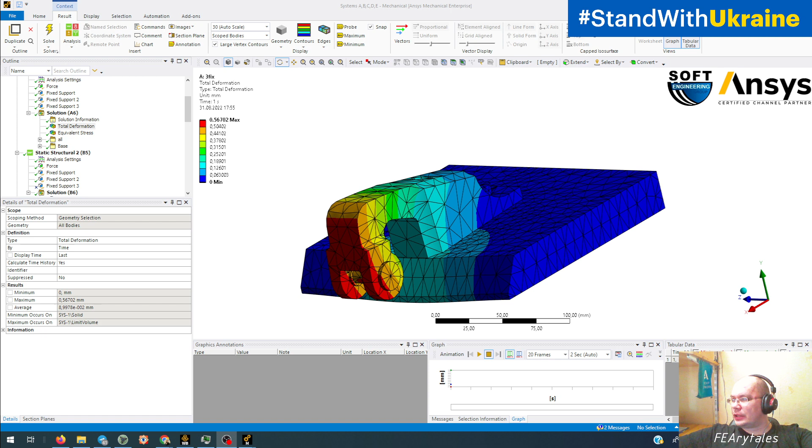Now we continue talking about the difference in statements and the difference in results which are obtained with different statements.

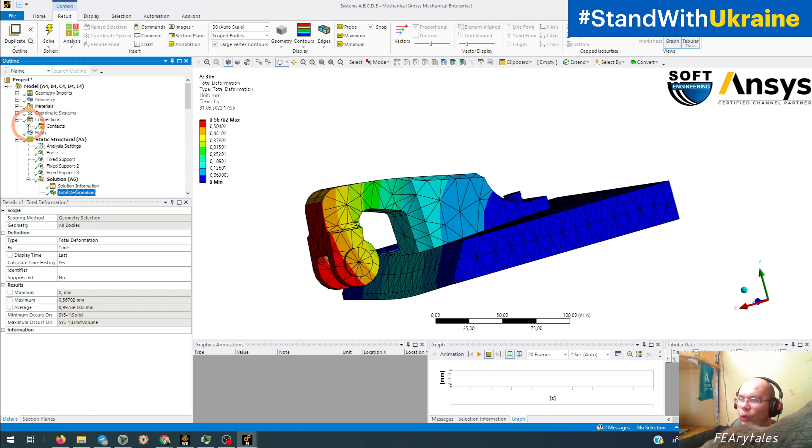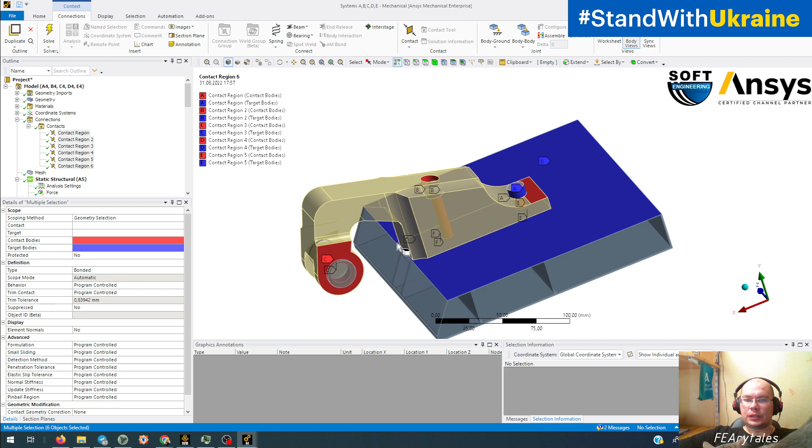Today we talk about contacts. This result is without non-linear contact, so it's with linear, bonded contact for all objects. All six different types of contacts - with crank and base, with bolts and crank, with bolt and base, with pin and crank - all these connections, all these contacts are bonded. So it's a linear contact in terms of Ansys.

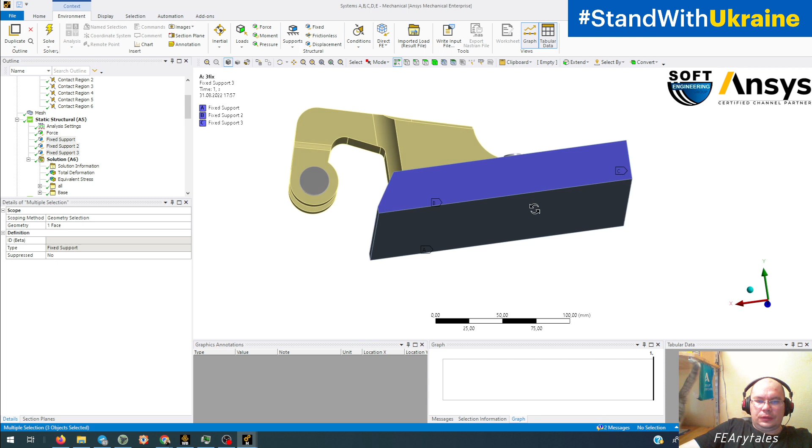We obtain a result for 3 faces that fixed for 10,000 newtons. We obtain 0.57 millimeters.

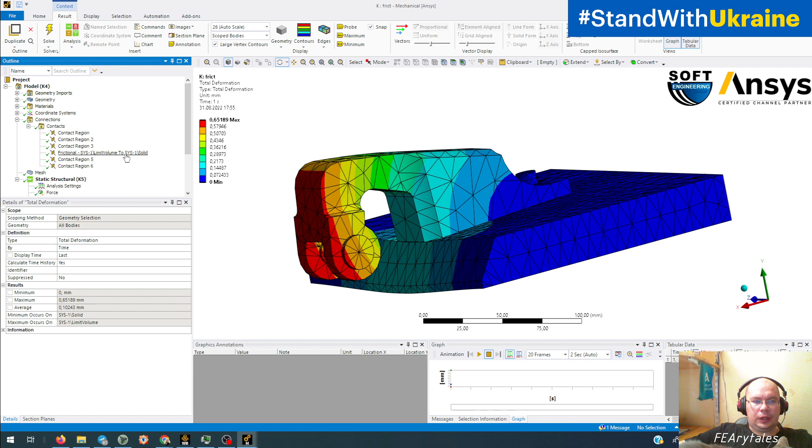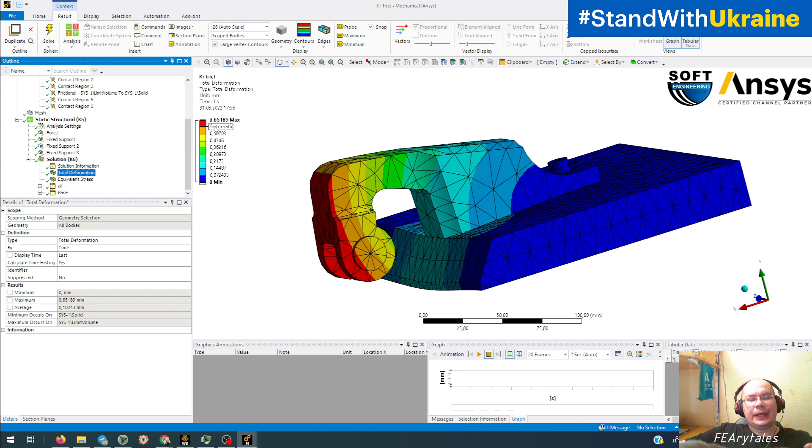And if we apply contact between crank and base in a non-linear variant of this contact, so for now it's frictional, not bonded. All others are bonded, and this one is frictional. We obtain a result of 0.65 millimeters, so it's almost 20% difference in result.

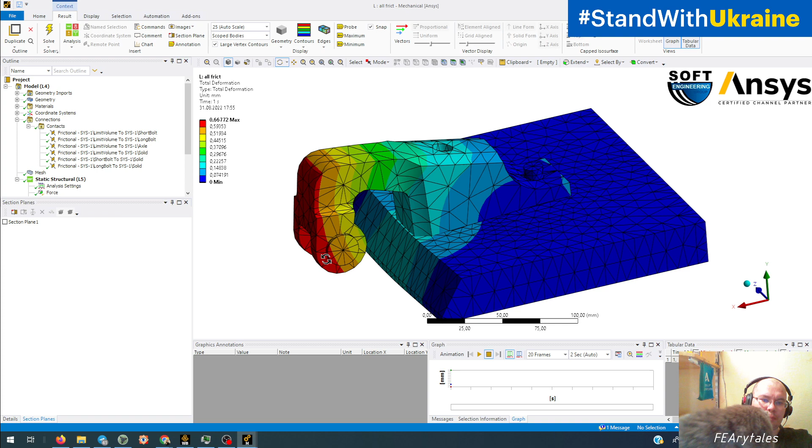If we go further and change all types of contacts to frictional - bolts and crank, bolts and base, pin and crank, crank and base, so all geometry - all geometry have non-linear contacts. We obtain 67, so it's less than 5% difference in result on deformation.

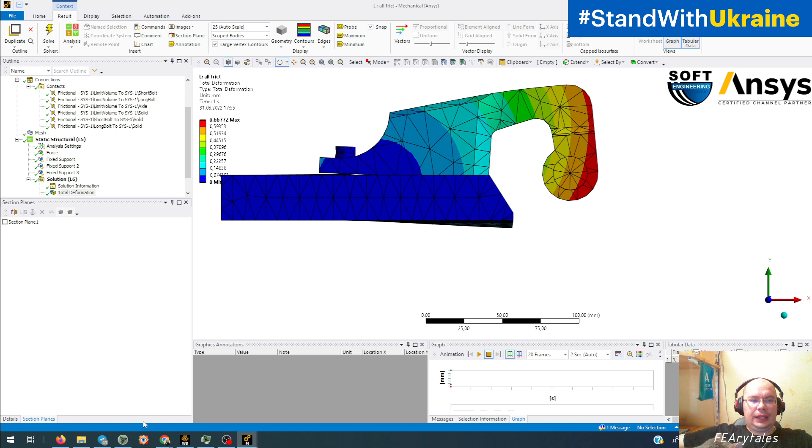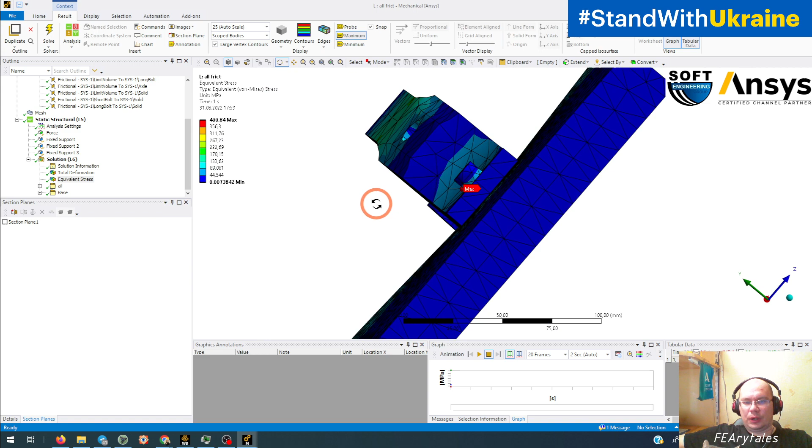In stresses, we obtain 400 megapascals maximum. We see that maximum is here. We don't understand where it is exactly, but we'll talk about it later. 400 megapascals here, not here, and not here.

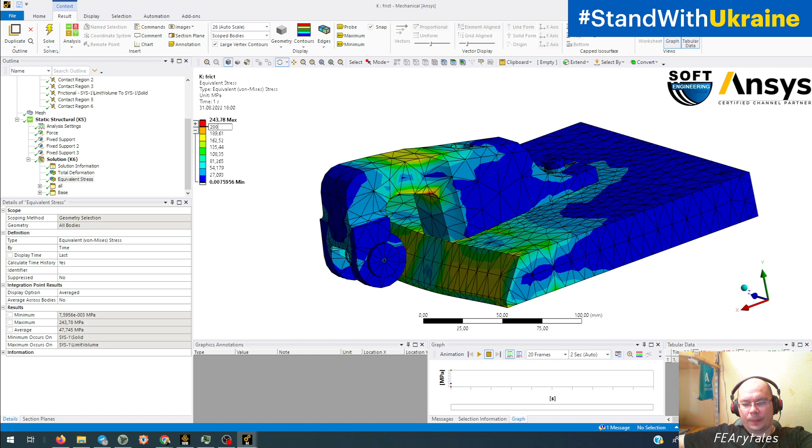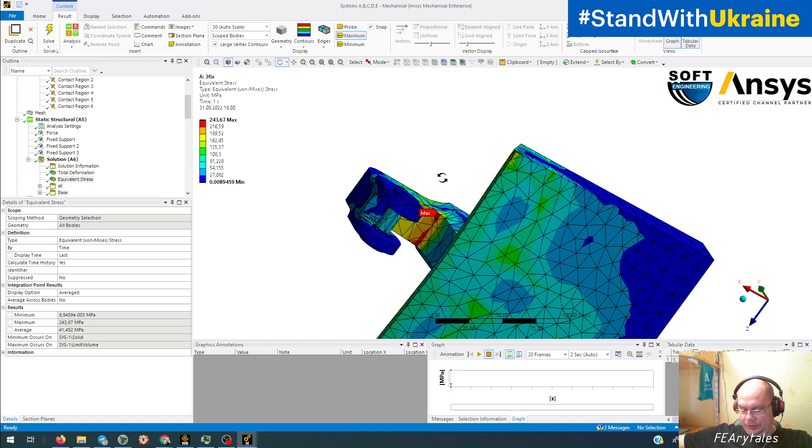If we change scale to original, we see that stress distribution behavior is much closer to original, and it's not very dependent on the type of contacts for this task, but we see some difference, and we see that the maximum with one contact is in the same place where we have the maximum in the original task with bonded contact.

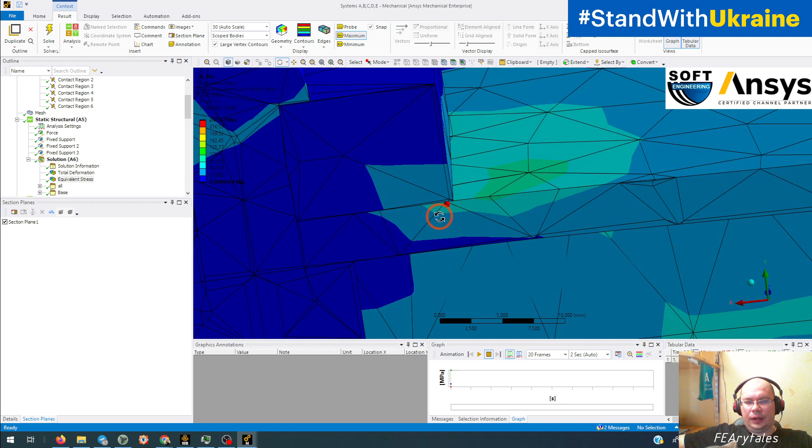What difference in behavior can we see additionally? Here we see that our objects are glued one to each other, and it doesn't have any gap here, any deformation of bolts which are not corresponding to crank or base.

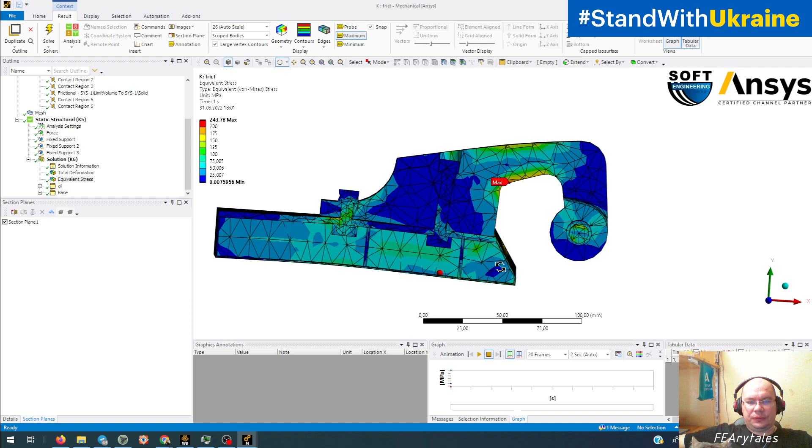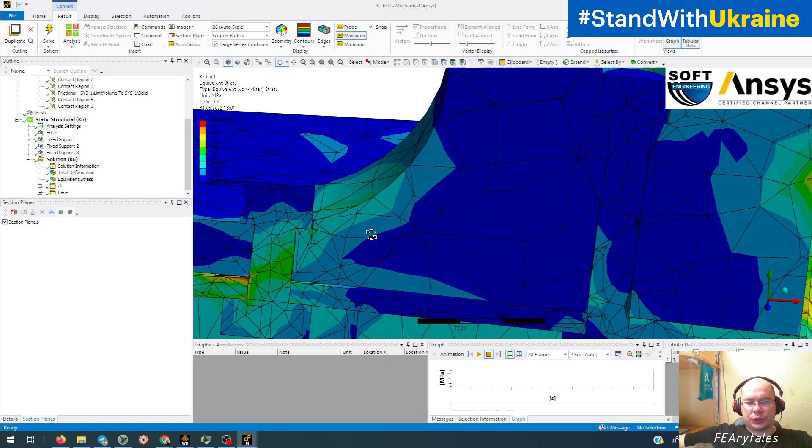If we take a look here on a task with one contact, we see some difference. We see that we have some gap here, and even here. But we almost don't have a gap here for one contact. Our bolts are glued to crank, glued to base, so we have very small deformations here. It has a strange view here, but the reason is that we project geometry of elements on a section plane, so it doesn't matter.

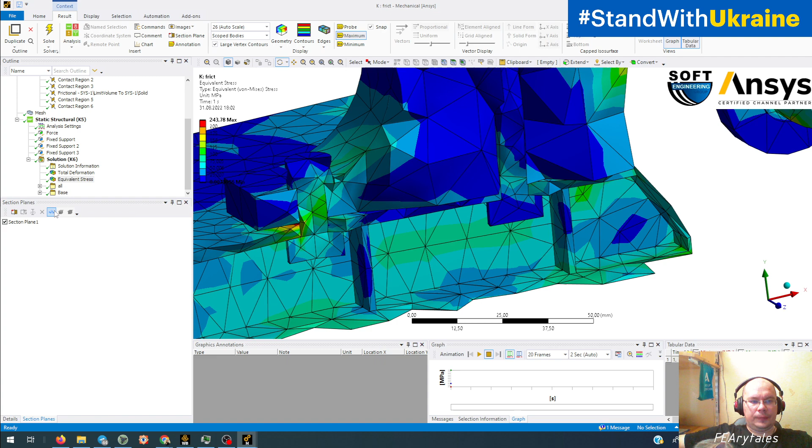And we see that here we have very big stresses - not the maximum, because the maximum is here, but big stresses here.

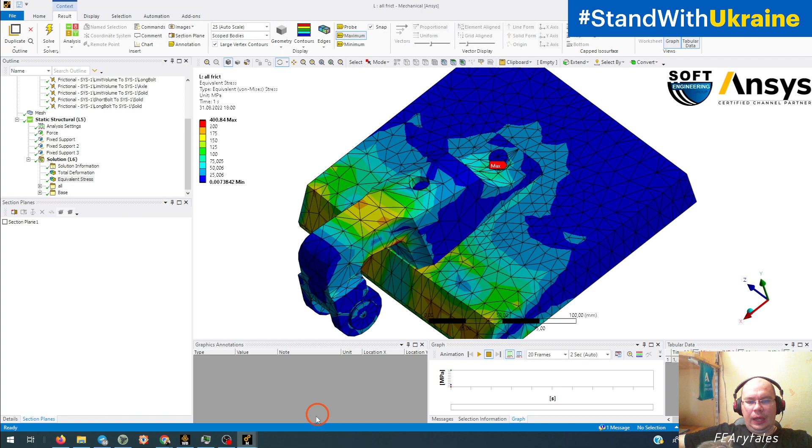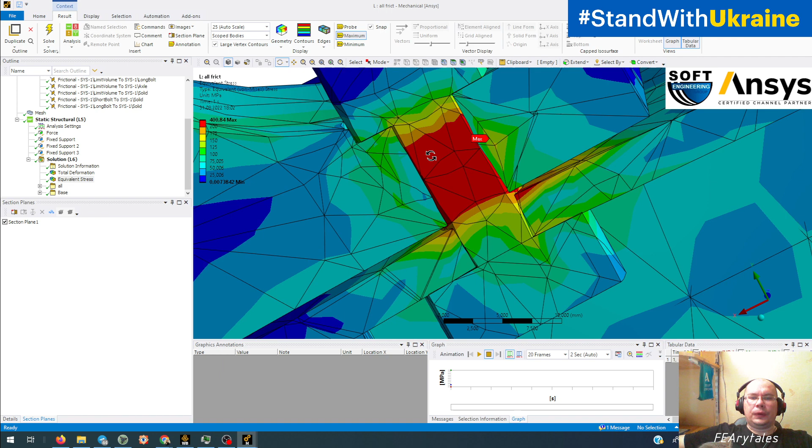On the last variant, where we have all contacts, we see that we have the maximum either on the bolt surface or on the hole of the crank, which is present here. We see difference in behavior. We see that a gap is present here, and if we change the scale factor, we'll much better see that we have a gap here, and the point of rotation of our crank is not here, not here as in the second variant, but here as in the third variant. It's a very small gap, but it's present.

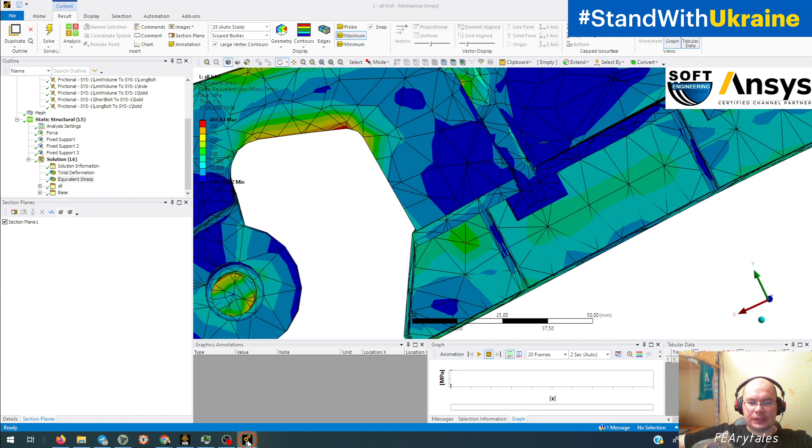In the second variant, because of the bolt which is glued to both objects, rotation started here. We can also see some difference in those places and those places for the bolts, and for the crank.

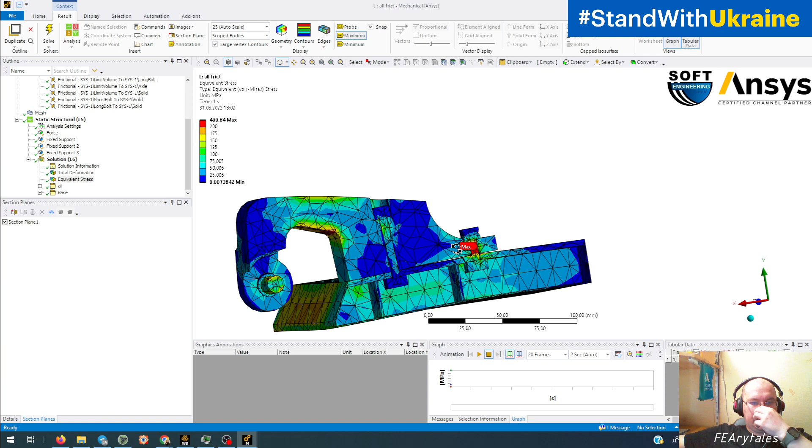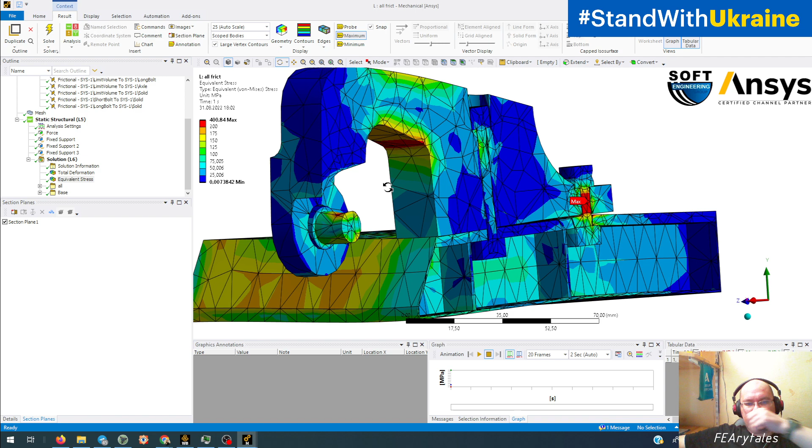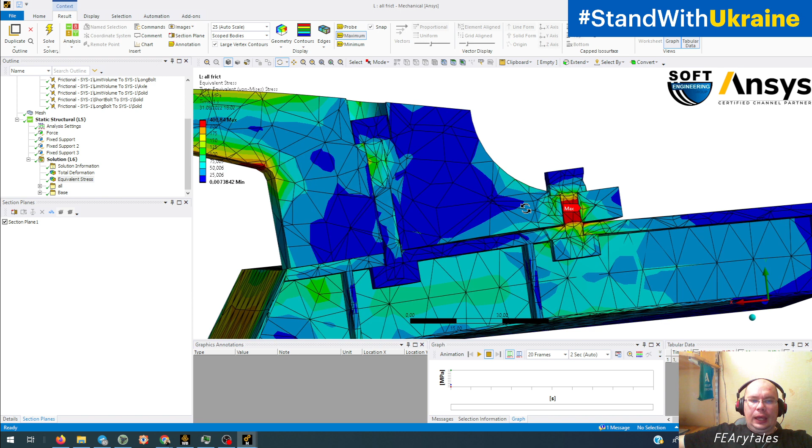So that shows that contact can affect your simulation result very, very strongly. So it's very important to model your task with more physical contact if you need more physical behavior. It's longer because when you solve with nonlinear contact, you have a number of calculations that you need to do to obtain a result. But it's much more accurate.